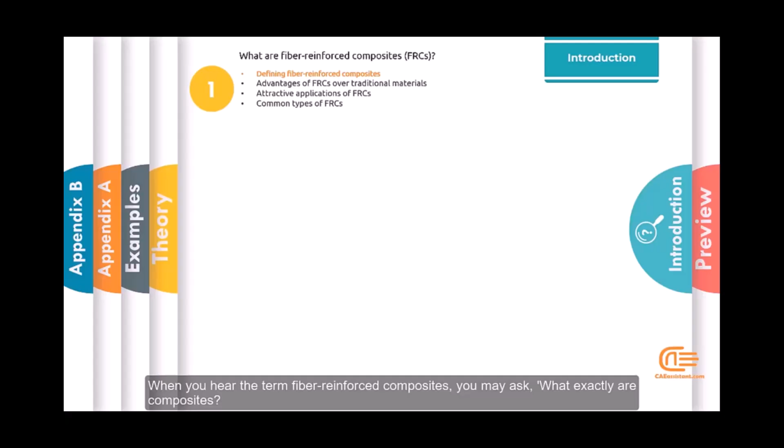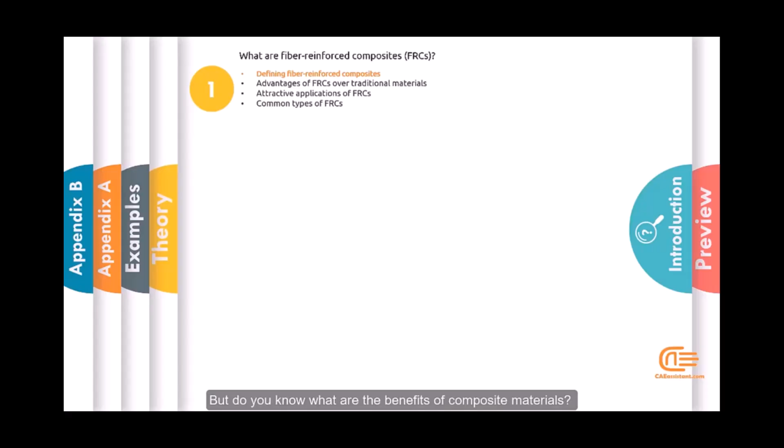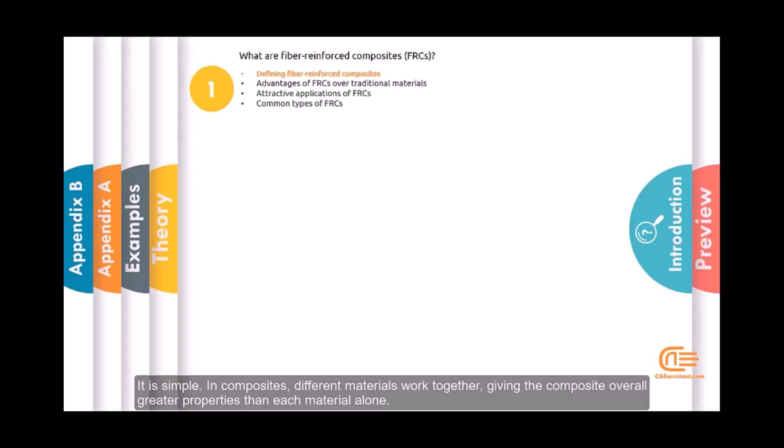When you hear the term fiber-reinforced composites, you may ask, what exactly are composites? Let's explain. A composite is a term that represents the combination of two or more different materials. But do you know what are the benefits of composite materials?

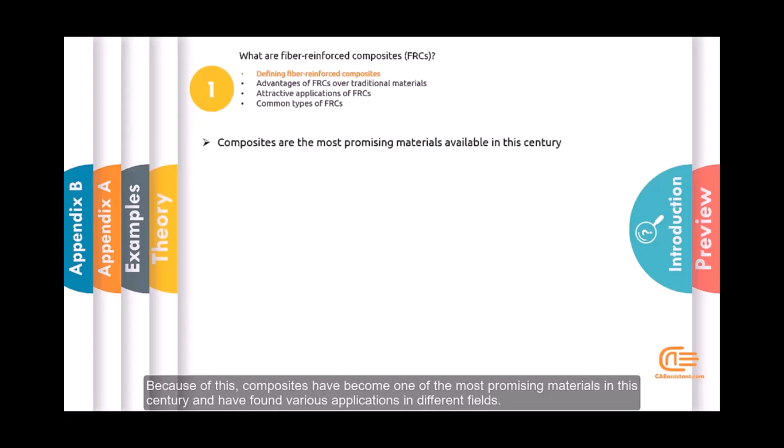In composites, different materials work together, giving the composite overall greater properties than each material alone. Because of this, composites have become one of the most promising materials in this century and have found various applications in different fields. Fiber-reinforced composites are made from fibers and matrix, as shown in the figure.

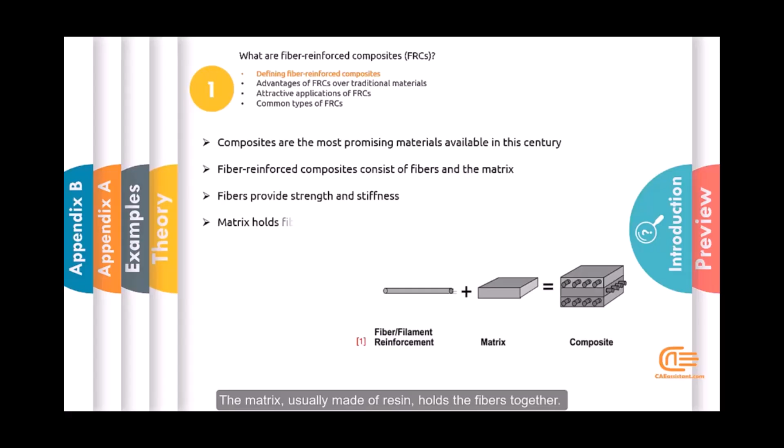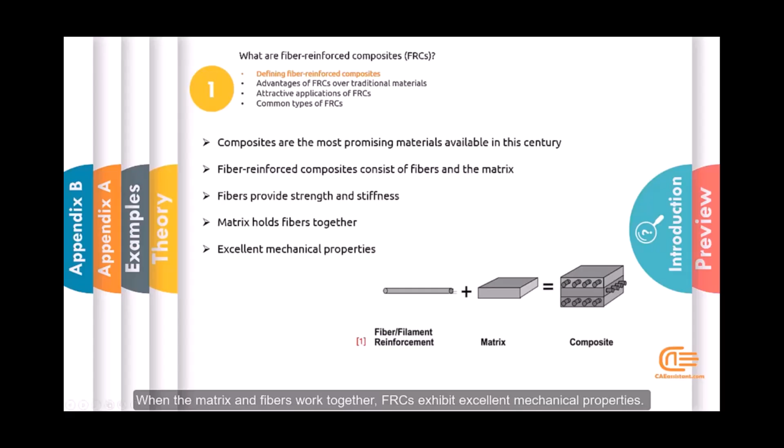But do you know the role of fibers in FRCs? Their main job is to provide strength and stiffness to the composite. And what about the matrix? The matrix, usually made of resin, holds the fibers together. When the matrix and fibers work together, FRCs exhibit excellent mechanical properties. This makes them suitable for various applications due to their interesting features.

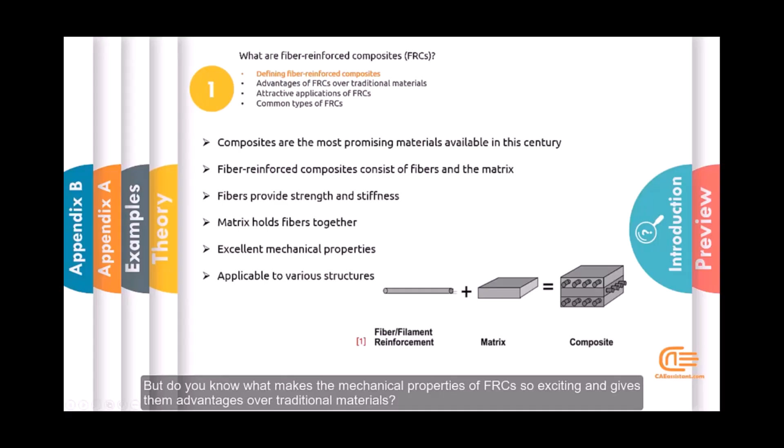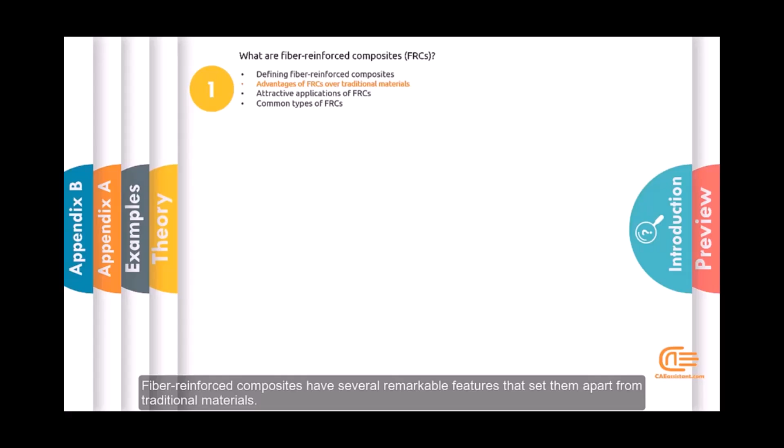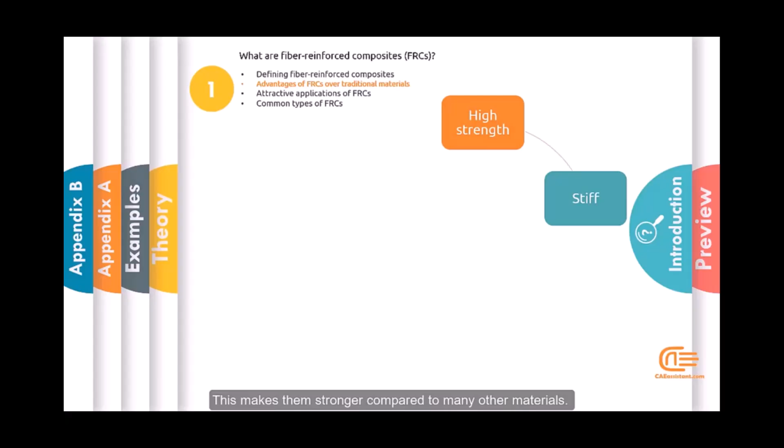But do you know what makes the mechanical properties of FRCs so exciting and gives them advantages over traditional materials? Let's find out. Fiber-reinforced composites have several remarkable features that set them apart from traditional materials. Firstly, they possess high strength and a valuable elastic modulus, indicating their stiffness. This makes them stronger compared to many other materials.

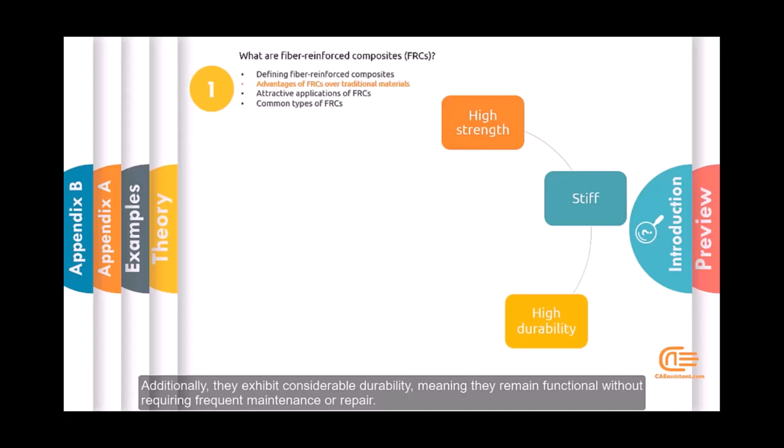Additionally, they exhibit considerable durability, meaning they remain functional without requiring frequent maintenance or repair. This durability is valuable as it helps materials last longer with fewer repair costs.

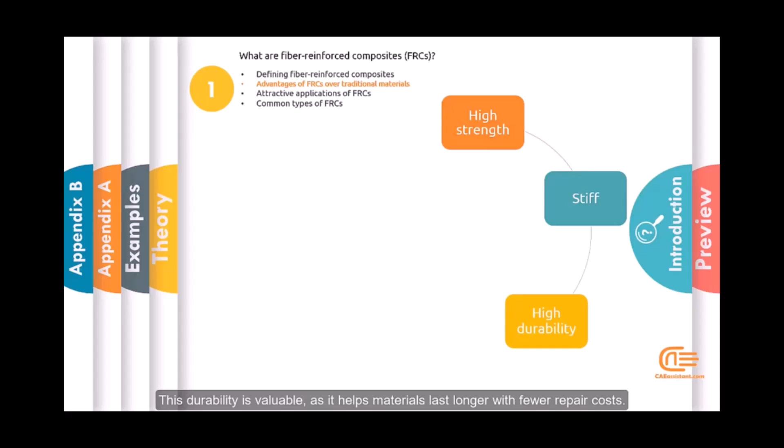FRCs are lightweight yet possess higher strength to weight ratios than existing materials. This makes them easier to use in various applications without the limitations due to excessive weight.

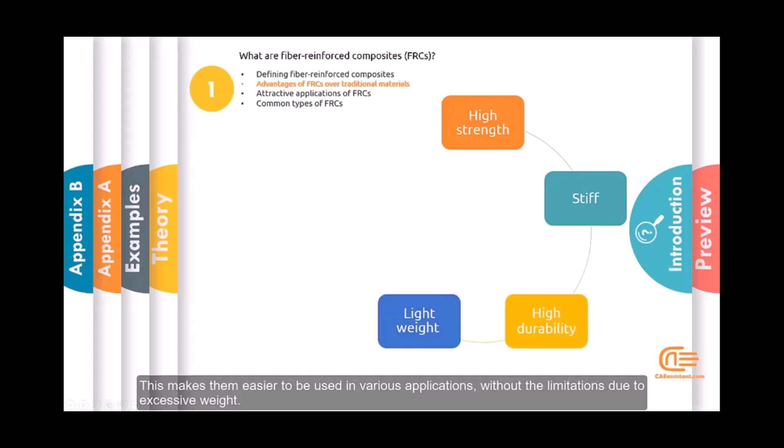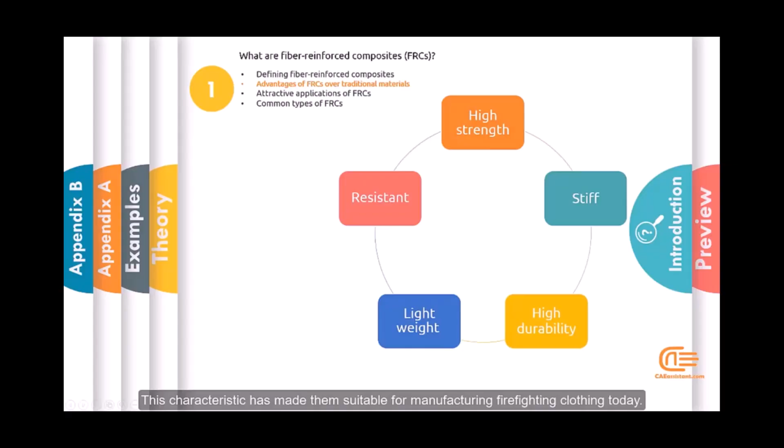Another notable advantage is their resistance to corrosion, impact, and fire. These characteristics have made them suitable for manufacturing firefighting clothing today. These advantages have attracted the attention of practitioners in recent years, leading them to prefer using FRCs over other materials.

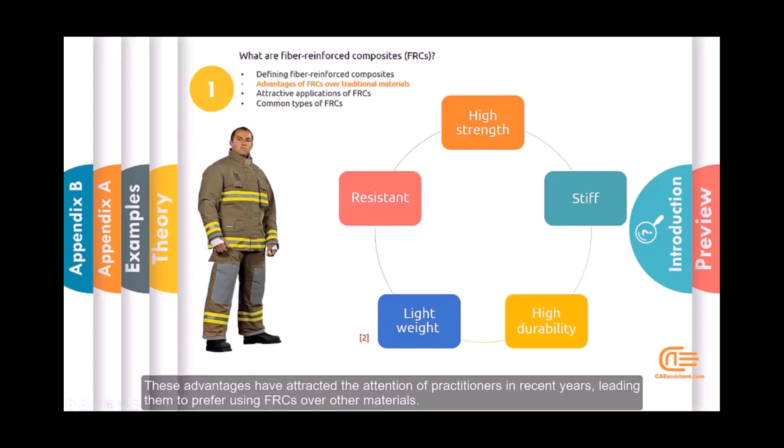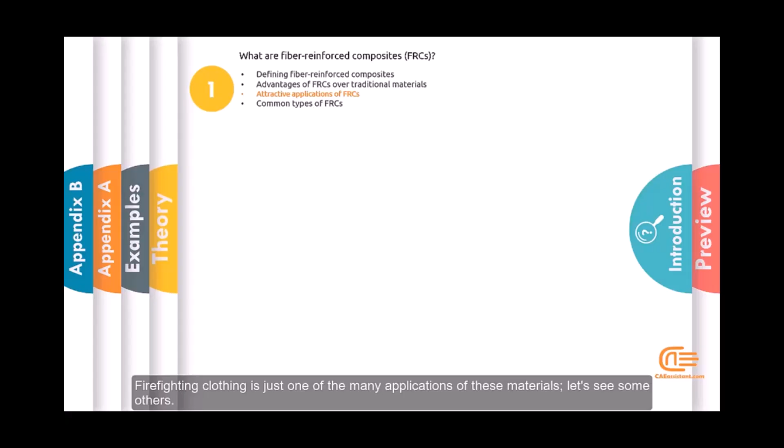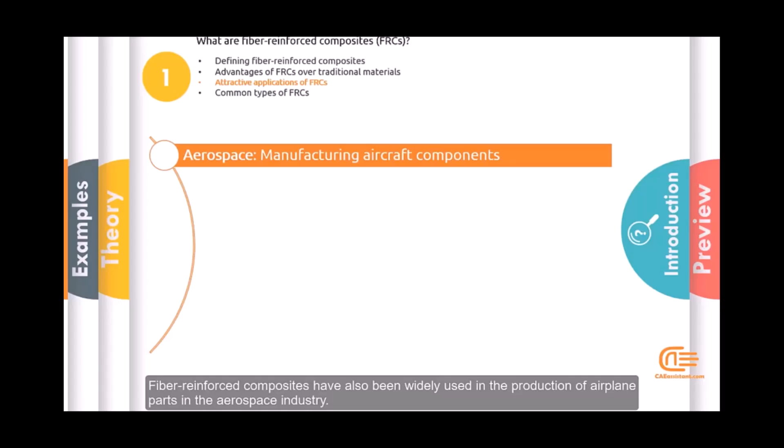FRCs help reduce the weight of airplanes and their fuel consumption. They also enhance aircraft aerodynamics and improve their ability to withstand fatigue and corrosion damage.

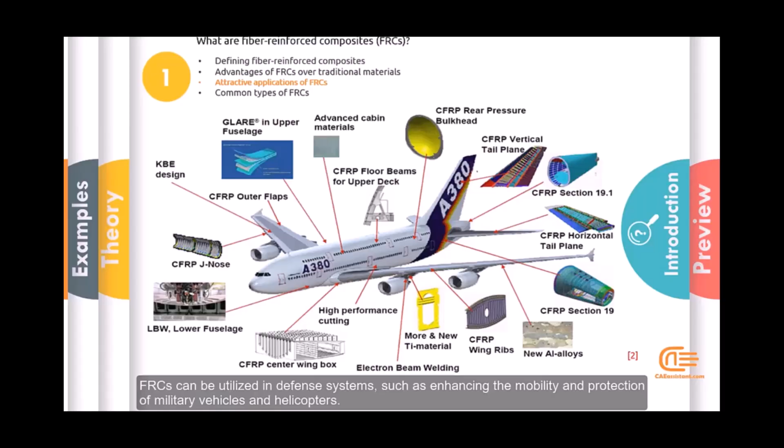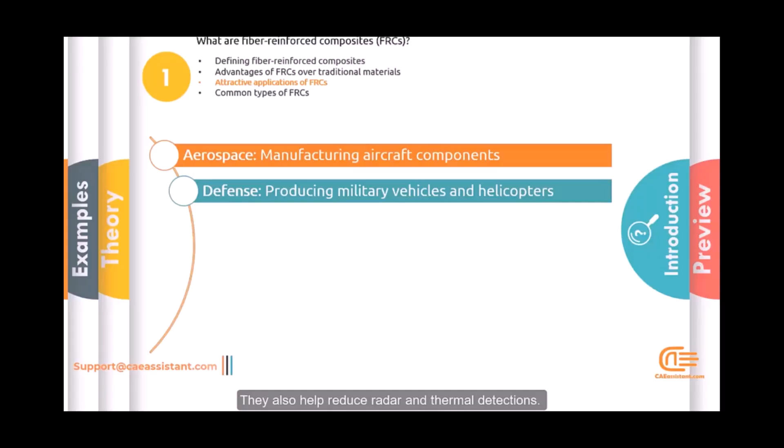Moreover, today numerous parts of helicopter rotor blades are constructed using composites, thereby improving their performance.

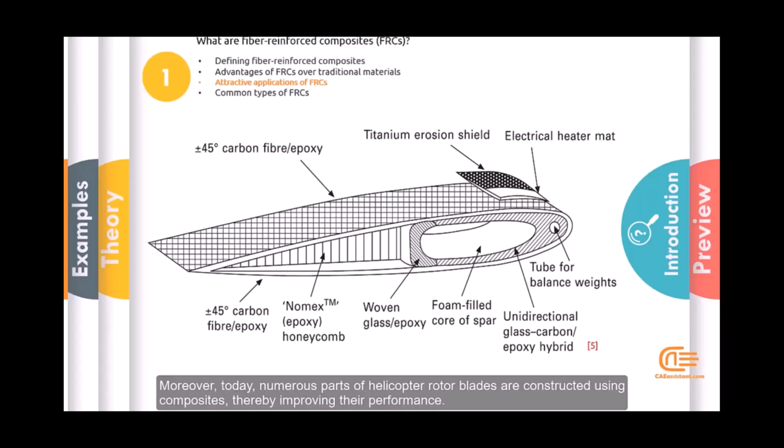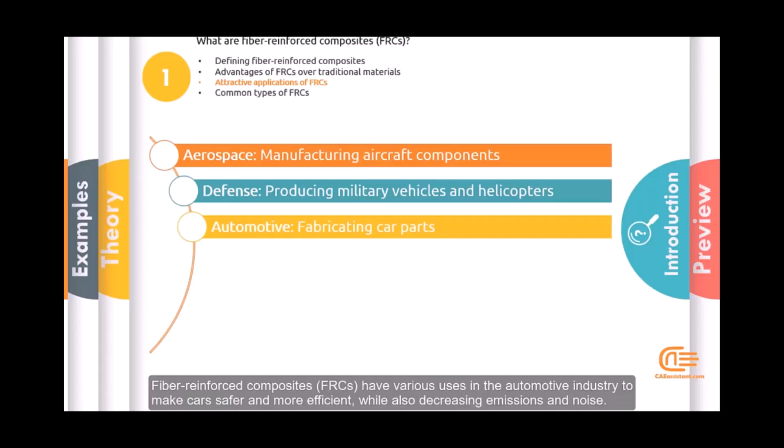Fiber-reinforced composites, or FRCs, have various uses in the automotive industry to make cars safer and more efficient, while also decreasing emissions and noise. You might wonder where they are used.

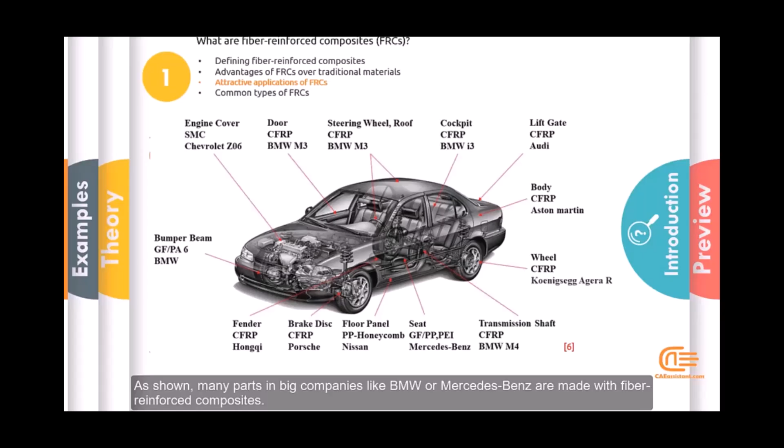Just take a look at the picture. As shown, many parts in big companies like BMW or Mercedes-Benz are made with fiber-reinforced composites. Now you can better understand how FRCs are utilized in the automotive industry.

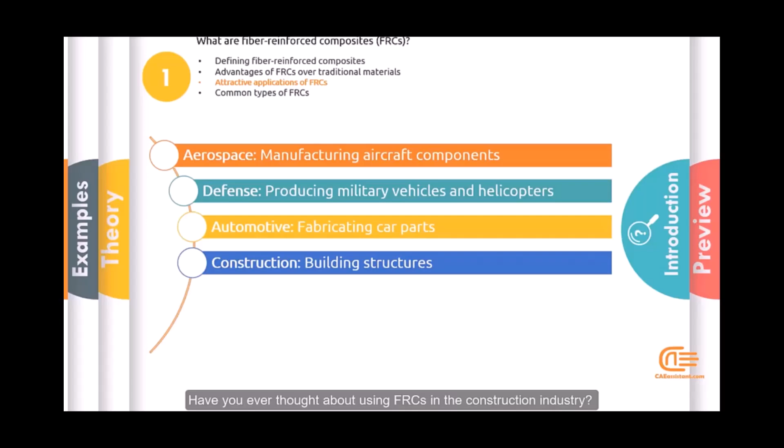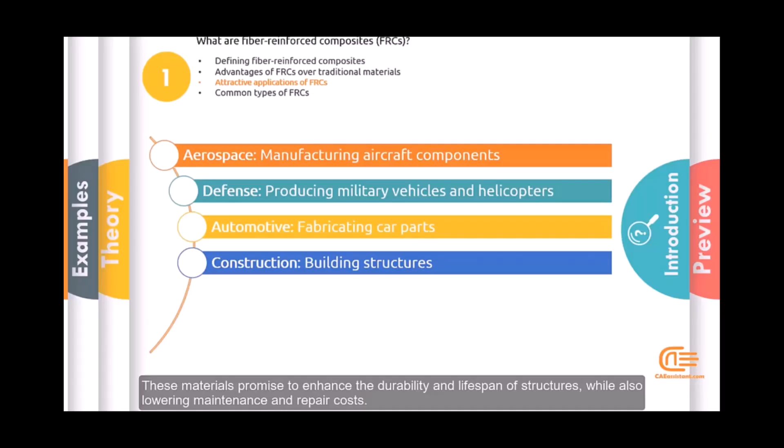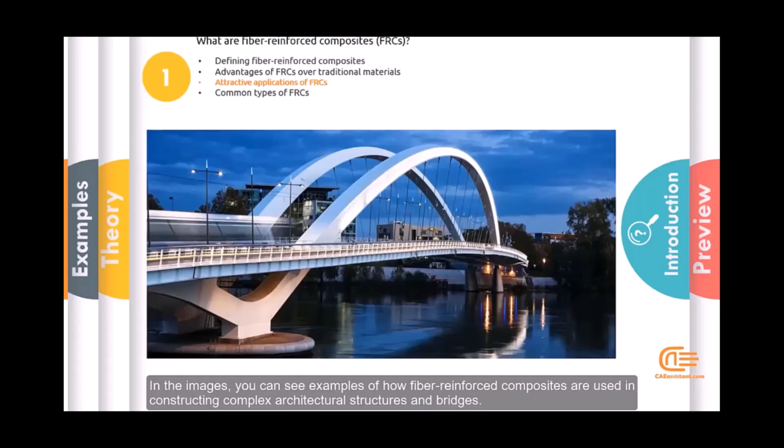Have you ever thought about using FRCs in the construction industry? These materials promise to enhance the durability and lifespan of structures while also lowering maintenance and repair costs. In the images, you can see examples of how fiber-reinforced composites are used in constructing complex architectural structures and bridges.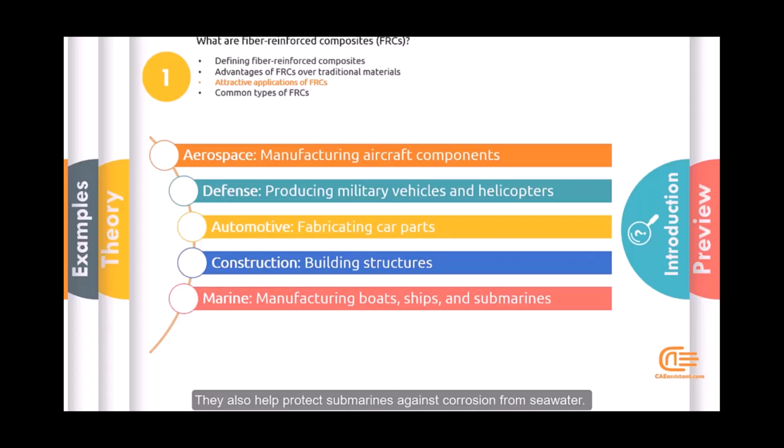FRCs can also be used in the marine industry to make boats and ships perform better and stay stable. They also help protect submarines against corrosion from sea water. Here you can observe the manufacturing process of a boat using FRCs.

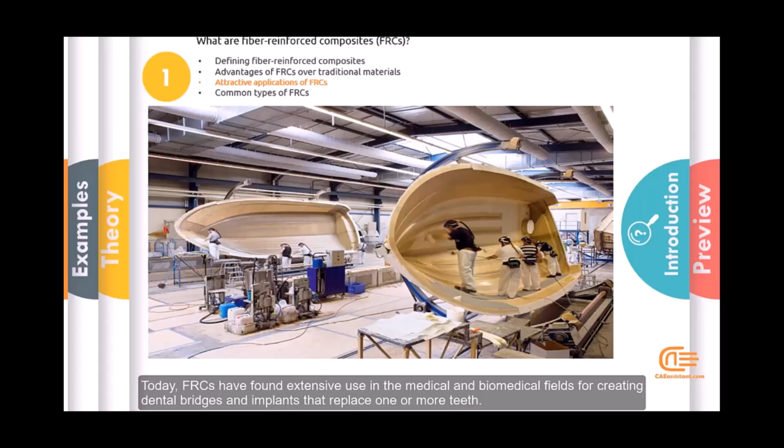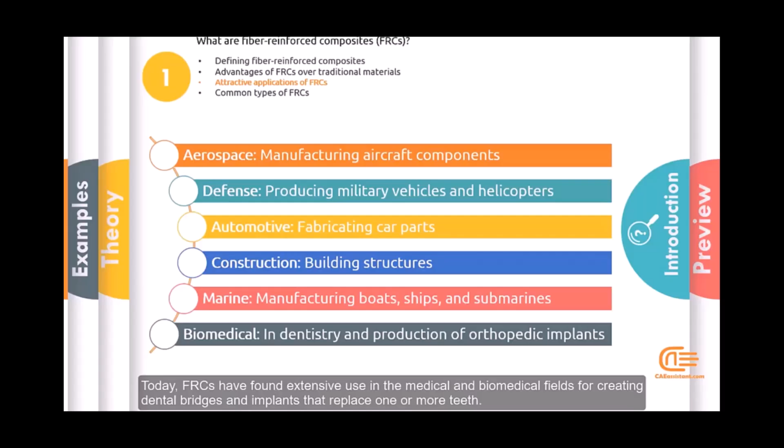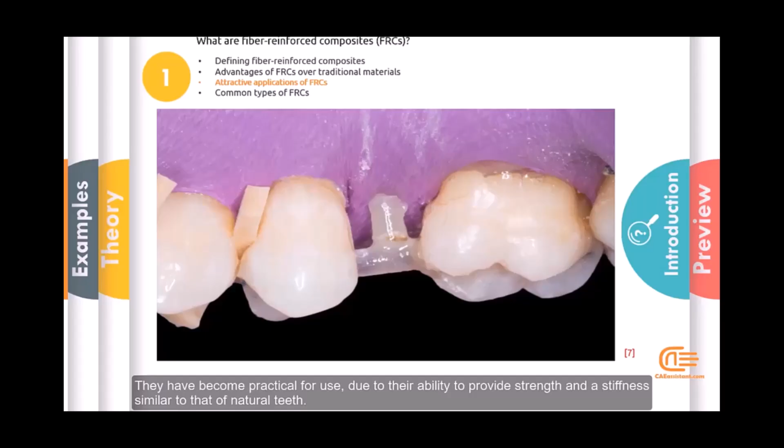Today, FRCs have found extensive use in the medicine and biomedicine fields for creating dental bridges and implants that replace one or more teeth. They have become practical for use due to their ability to provide strength and stiffness similar to that of natural teeth. In addition, they are widely employed for orthopedic implants.

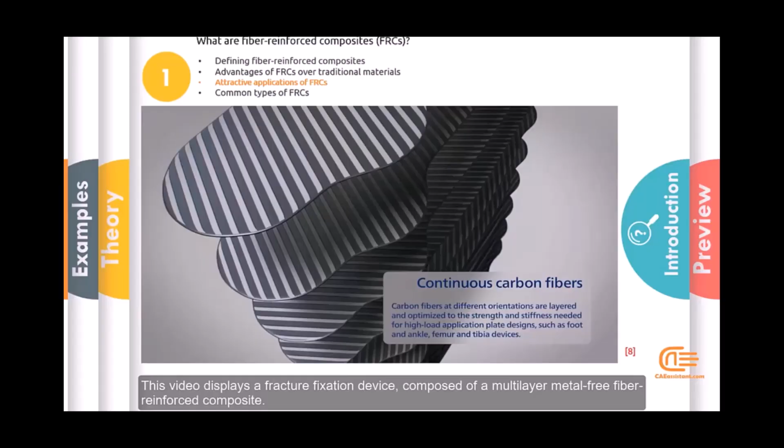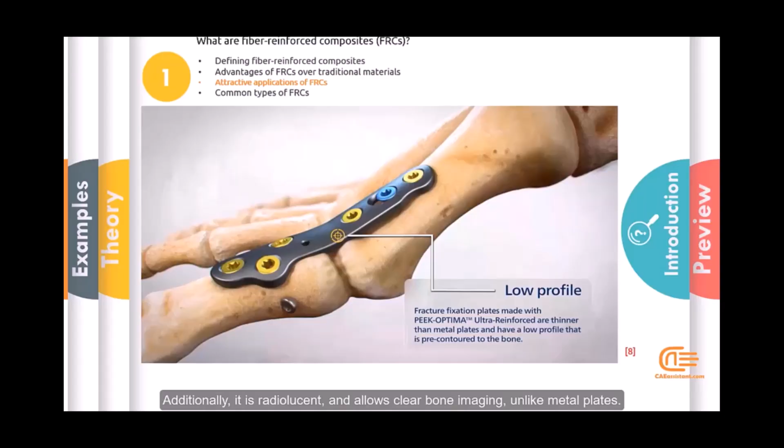This video displays a fracture fixation device composed of a multi-layer metal-free fiber reinforced composite. Made of carbon fibers, it provides the necessary stiffness and strength to withstand high loads. It is thinner than traditional metal plates and fits well with the bone shape. Additionally, it is radiolucent and allows clear bone imaging, unlike metal plates. These are a few applications of FRCs among others.